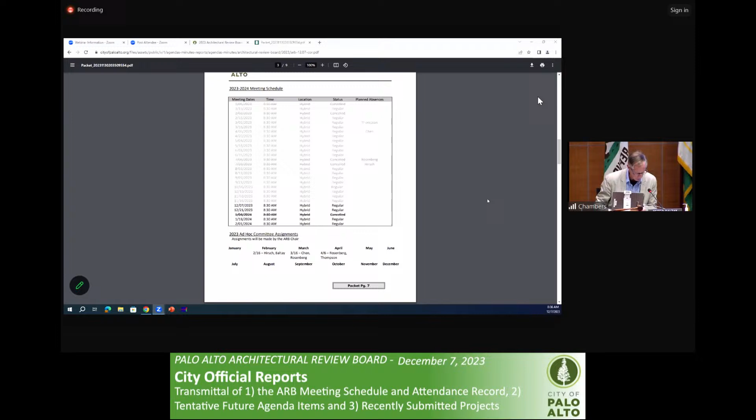So I understand we've shifted our retreat from early January to end of February. Is that right? Yes, my understanding is there was a movement afoot to put a retreat on the same day as the HRB meeting, which would exclude people like me because I am the HRB liaison. Not that that's why we changed it, but it's difficult to have two.

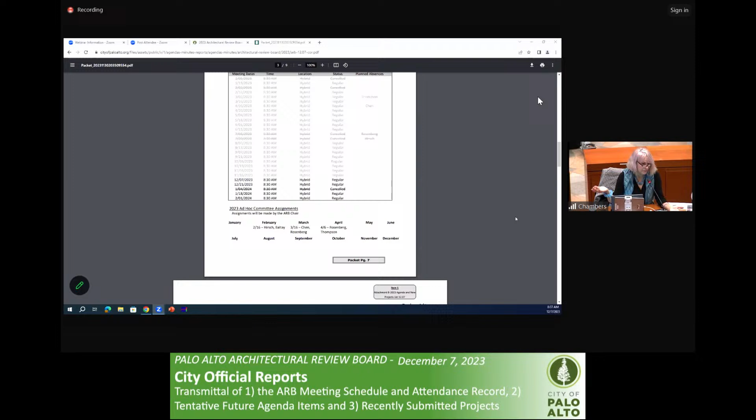I think we do need to have that on Zoom as well or recorded. I don't see it here, but I think the discussion was perhaps towards the end of February. I think it was February 29th, if I recall. Oh, leap year, that's right, it happens every 4 years. That was the discussion. So our retreat will be on February 29th, to my colleagues, so we know that.

In fact, that would be fun to put that in the bylaws: every 4 years, on leap year day. Just every 4 years, you need to have a retreat.

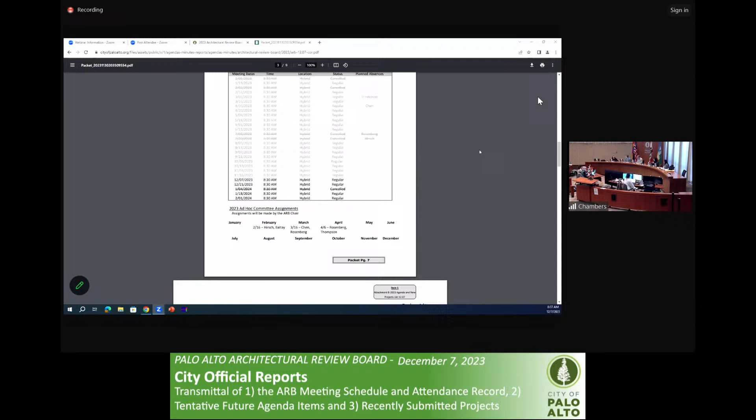Can I ask you, is it recorded? I don't think so, but... What, recorded that meeting as a meeting? Yes, a retreat is a formal ARB meeting that's recorded, and staff, am I right on that? The ARB retreat meeting is a formal public meeting. Generally we advertise in advance and put the potential topics to be covered.

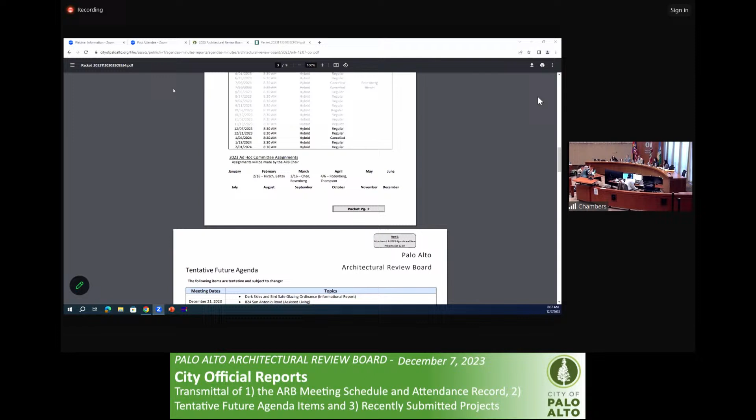We have to talk about which topics are on the list. You don't have to cover them all, but definitely think about them all in advance and plan for discussing certain topics. And then the public is invited to speak under oral communications or whatever we call it for this agenda, and then the ARB has a chance to retreat in a public kind of a way.

I'm just recalling the last meeting I remember is the one we had at the Art Center. We did one there, yeah, and I don't think it was recorded. Yeah, I don't know, I'd have to talk to staff about that. I believe the Art Center meeting held over the years was about the ARB Design Awards and selecting those. I don't know, I haven't been involved as the liaison for a while.

So my understanding is that we do record every ARB meeting. Well, thank you for bringing that to our attention, Board Member Hirsch. We'll make sure that in the future, all ARB meetings, including the retreat, are properly recorded.

That's fair enough. We do have our list of pending and coming in ARB projects, and we have a new one on the list I'd like to appoint an ad hoc subcommittee to. This is the fairly large project for 150 California Avenue that was recently in the news, and it's quite a big deal. I'd like to appoint a subcommittee for that. Does anybody want to be involved in that? It's at the very end, on packet page 13.

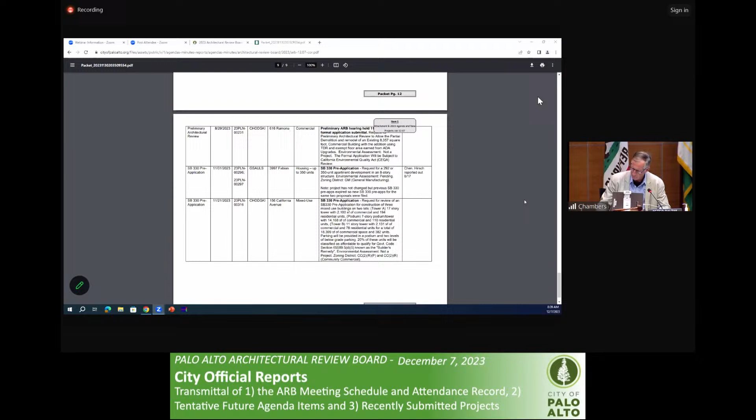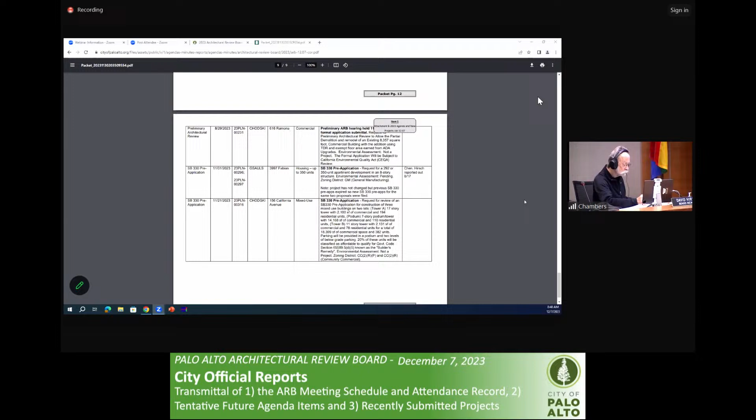Can I ask a question about this first? Has it been through council for preliminary approval? Staff, can you answer that? If you're talking about the 17-story project that has made the news, that came in without advance notice to staff. It has not been to city council. It has just been submitted and discussed in the media.

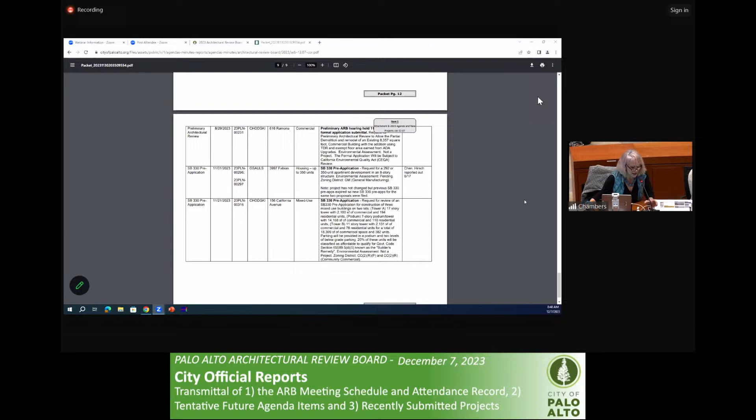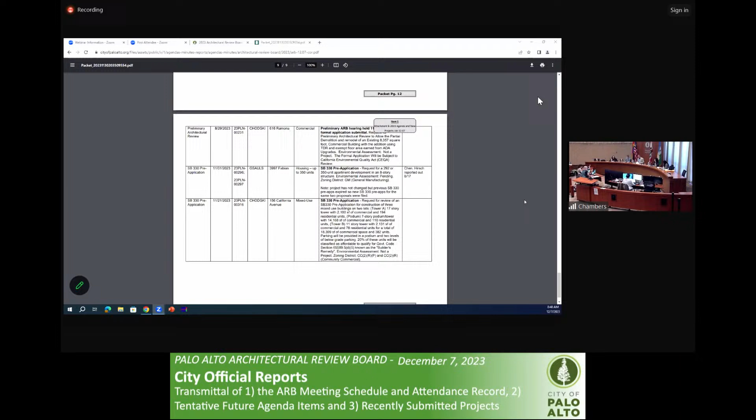Okay, next item is a study session. So we're going to move into 70 Encina Avenue. Request for preliminary architecture review of a proposed project consisting of 10 new condominium townhouse units and a new 3-story, 22,230 square foot building and site improvements to replace the existing surface parking area. The formal application will include a rezoning to planned home zoning.

So to my colleagues, this is a study session. There's no need for disclosures, but I'd offer anyone a chance who would like to make a disclosure. Board Member Adcock, do you have any disclosures you care to make? No? Board Member Chen? Yeah, I visited the site. Thank you. I disclosed that I visited the site as well. I visited the site as well. I visited the site.

Okay, so with that, can we have a staff report, please? Yes, I'll go ahead and share my screen and begin the presentation. My name is Emily Callis. I am the project planner for 70 Encina, and this is the preliminary review study session.

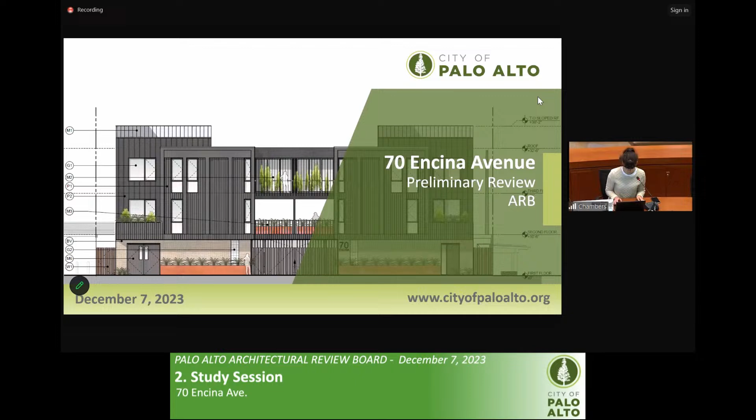This project, again, preliminary review for a proposal to rezone the two community commercial zoned properties to planned home zoning, PHZ, in order to allow for 10 residential condominium units in a 3-story structure on the currently vacant property. Per the planned home zone requirements, there would be a net increase in housing with no jobs generated and at least 20% BMR units provided, which in this case would be 2 units.

There was a council pre-screening in September of 2022. However, the project has been substantially redesigned since then.

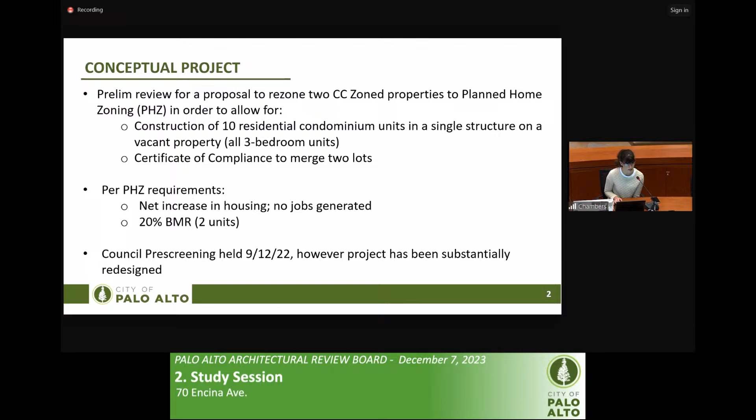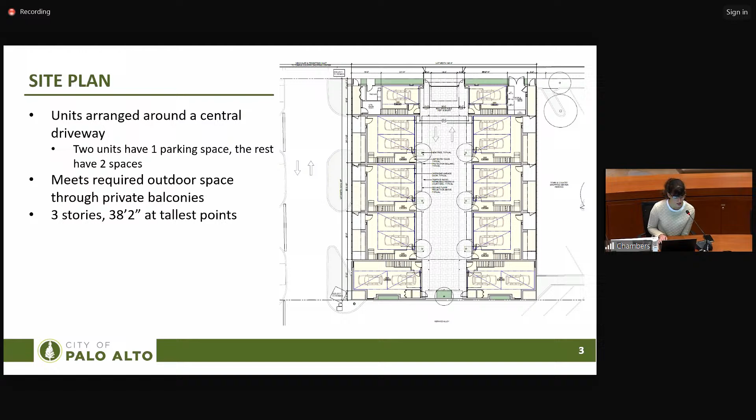The site plan includes the 10 units arranged around a central driveway courtyard. Most of the units have 2 parking spaces, though there are 2 units that have 1 parking space. There is outdoor space provided in 2nd-story balconies as well as in the side yard areas of the site. It's 3 stories tall and 38 feet 2 inches at the tallest points where 50 feet is allowed.

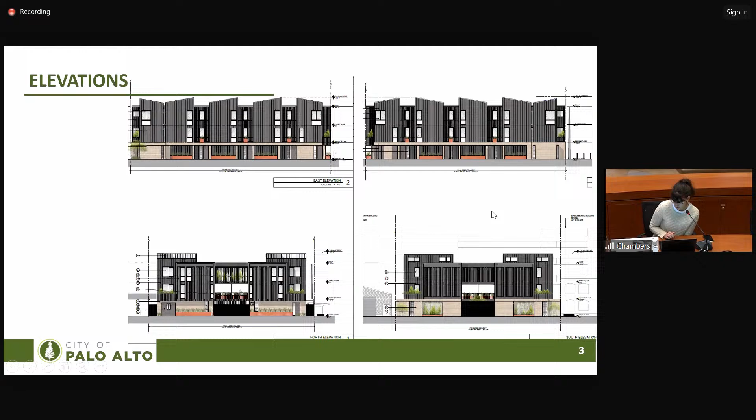In terms of the elevations, the bottom left is the front elevation, the 2 sides, and then the bottom right is the rear adjacent to Town and Country. The proposed materials include a brick veneer and glass block on the 1st floor with board and batten siding on the upper floors, as well as bronze and orange metal accents.

Considerations for this morning's discussion include the relationship between the proposed project and its setting in the Town and Country parking lot, the site circulation, the usability of ground level open space and overall site landscaping, the architectural design, cohesiveness and quality of materials, and consideration of the context-based criteria and objective design criteria.

Again, since this is a study session, there is no formal recommendation or motion. And I kept my presentation nice and brief this morning. Thank you. Thank you, Emily.

So to my colleagues, I'd like to structure this today by having a round of questions of staff. If there's anything, then we'll have the applicant who's here, I believe, make a presentation to us, and again questions, and then we'll provide feedback. Again, this is a study session, so we're not making a motion or taking action, but I think accurate feedback is really important here, and this is a tight project to fit in.

So any questions of staff on this? Well, I'd like to start. Could you explain, please, this is taking what seems to be a bite out of the parking lot that's well used by Town and Country. How are they able to do that?

So the property is independently owned by the current property owners, which is not Ellis Partners, who own and operate Town and Country. And so they are within their rights to propose a project on this parcel. And does that affect the Town and Country's parking compliance? It is my understanding that Town and Country has a TDM plan and it will not impact their parking.

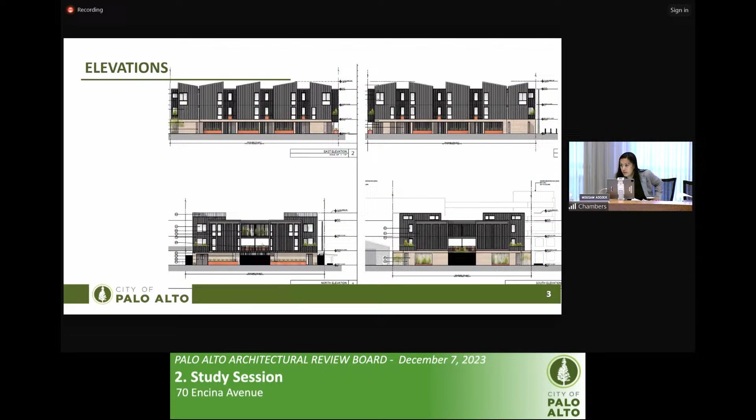So if I understand correctly, this parcel only has street frontage on Encina and no other drives, so fire access is only on Encina, with the townhouse proposed on the backside a couple hundred feet away from any public fire access. The access to the site is on Encina, and the site should be treated as an individual lot. As it continues through the formal review process, fire will be making sure there is adequate access within the site rather than accessing it from any of the parking lot sides.

Can I clarify that? I think it's an excellent question. The service alley that's there now, which appears to be a public alley, is in fact a privately owned alley owned by Town and Country, and so that cannot be considered as a fire emergency access for the site. Is that correct? Correct. Okay, thank you.

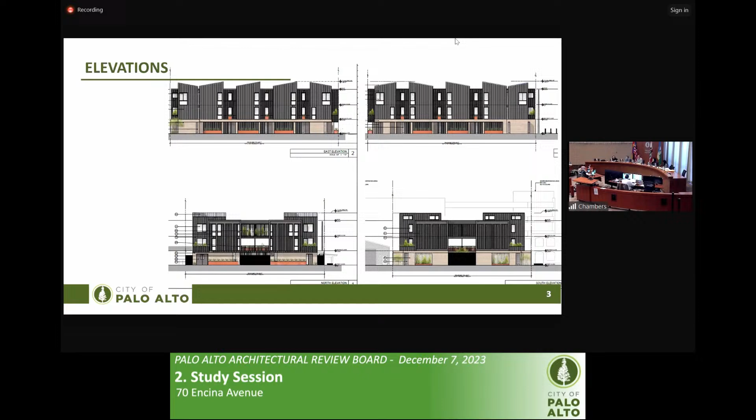Any other questions? Board Member Rosenberg: Good morning. I just want to back up here for a minute and start basic. What is the existing lot zoned as? Community commercial. Are they looking to rezone the property to be allowed to build the residences, or is that simply allowed under a CC zone? I believe mixed use is allowed, but I'll go ahead and double check that.

And while you're checking on that, I'll proceed forward. Did you have an answer yet?

Yes, it does not need to be rezoned to allow the residential use. It only needs to be rezoned to allow the floor area that is in excess of what would otherwise be allowed. Do you know if at this time the floor area they're requesting is meeting compliance for the CC zoning of a residential development? And does it need to be mixed use or can it be solely residential?

Attachment B of the staff report compares what is being proposed to the base zoning. Attachment B is the zoning comparison table, which compares what is being proposed to what is required under the CC Community Commercial Zoning District.

The places where it varies is the rear yard setback, which would typically be required to be 10 feet. The build-to lines, which would typically be 50% of the frontage built to the front setback. The site coverage, which is about 7% over what would otherwise be allowed. And the floor area ratio, typically 0.5 would be allowed and 1.84 is being proposed.

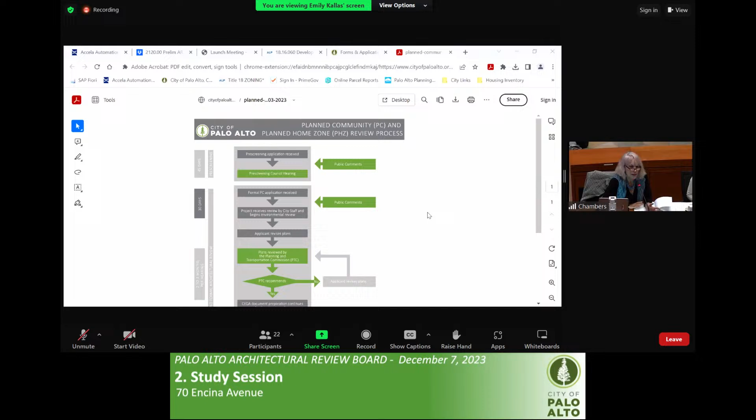It's basically planned community, in our zoning code. But they're not guaranteed, right? No, they're all part of the ask. Perfect, okay. Council, planning commission would weigh in on and council would act upon.

And is there any requirement for architectural deference to its surroundings, right? Neighborhood context, architectural context of its surroundings. It is notably next to Town and Country, which is low slung and very Mediterranean looking, and this is clearly not. So I'm wondering, is there anything in the requirements for development that asks for that sort of respect to its neighbors, architecturally speaking?

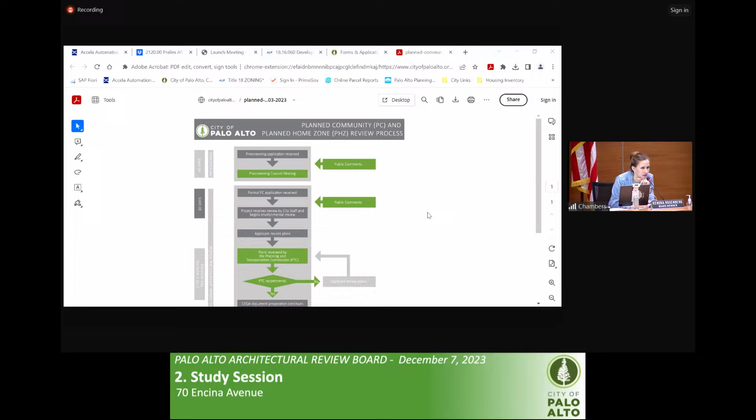Well, when staff is looking at projects, even for legislative projects like a PC, we do look at other codes such as objective standards, this kind of thing. We've gone through that with this board, and thanks for your help on that. So we can look at those guidelines and compare the project to those guidelines, for instance, or standards. But again, in the end, it's a council decision on the particular project on this particular site.

Understood. Okay, I believe that's all my questions for now. Thank you. Board Member Hirsch, any questions? I think everybody's been asking the appropriate questions regarding this particular project. Good. Well, let's keep moving along then.

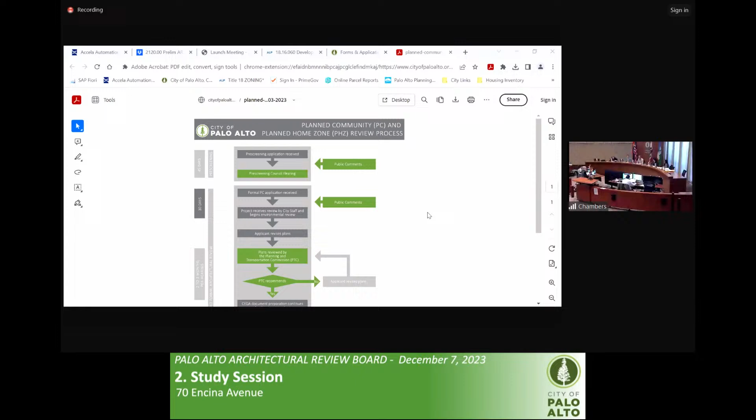We're going to next have the applicant give us a presentation, and after this we will take comments from the public. I understand Ellis Partners is here to speak as well. We very much want to hear what you have to say as well.

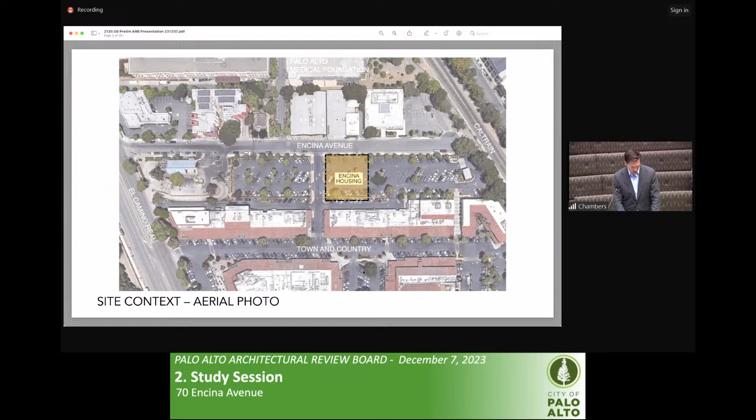We're excited to present this project to you in its newest form. The site has already been introduced. As you can see, it's two parcels immediately behind the Town and Country shopping center. We've already discussed the zoning of the parcel. It's surrounded by CC and CS commercial projects and properties. It's well outside the radius of any other residential project, so those impacts don't come into play here as they do on other sites.

Looking at the uses surrounding the parcel, basically all the properties on the north side of Encina are medical and professional office and support uses on that block, with a bit of change moving west. As noted in your questions, there's parking as well as a rear vehicular ingress and egress for Town and Country on both sides, and the southern edge is flanked by the service alley behind the shopping center.

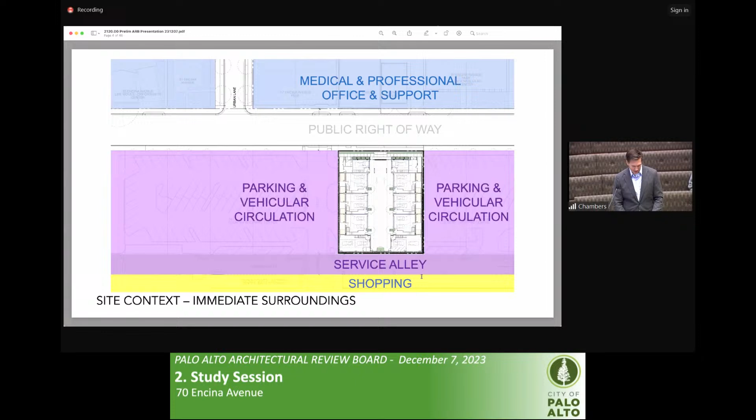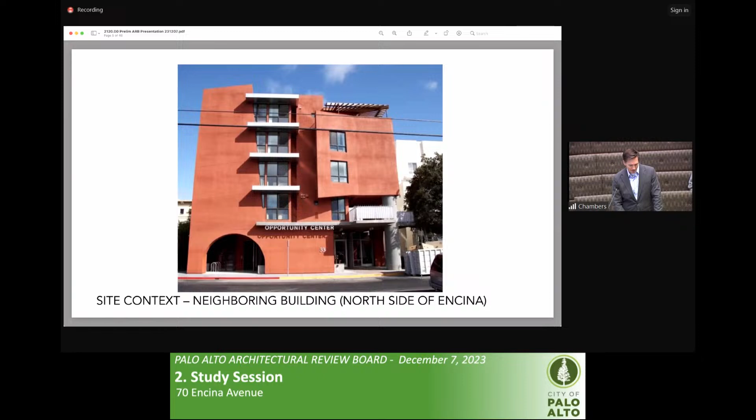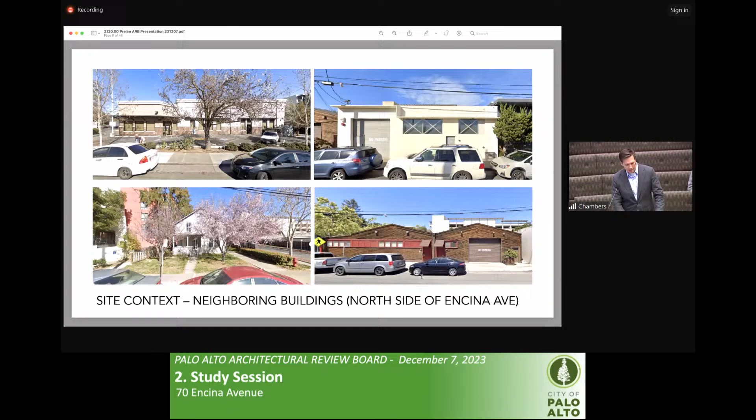In terms of architectural context, there's quite a mix of building styles. You've got the five-story Opportunity Center to the west, and most of the other projects immediately across the street are one and two stories - a very eclectic mix of material uses and building forms, with no real overarching style on the northern side of the street. Of course, Town and Country is a very large anchor to the south of the project, with a lot of consistency there - primarily single story with some two-story portions, predominantly dark painted materials with clay tile roofs, expansive coverings and overhangs in front of all the storefronts.

So we have these four very distinct edges: edge number one on the street, the typical facade; edge number two, a secondary facade you'll see a lot as you move down that vehicular ingress and egress; edge three, much more of a service side; and four, just basic parking.

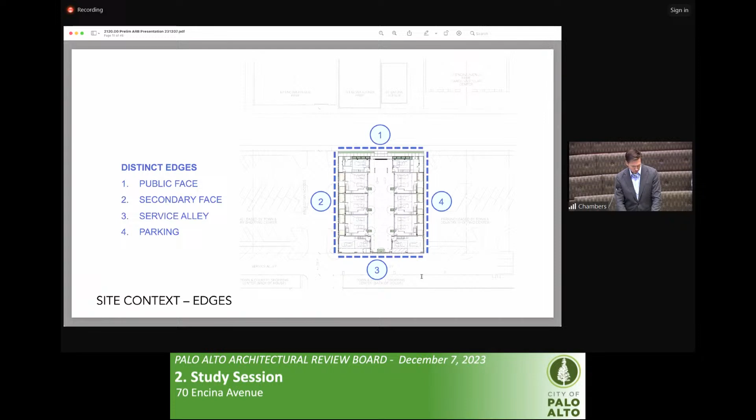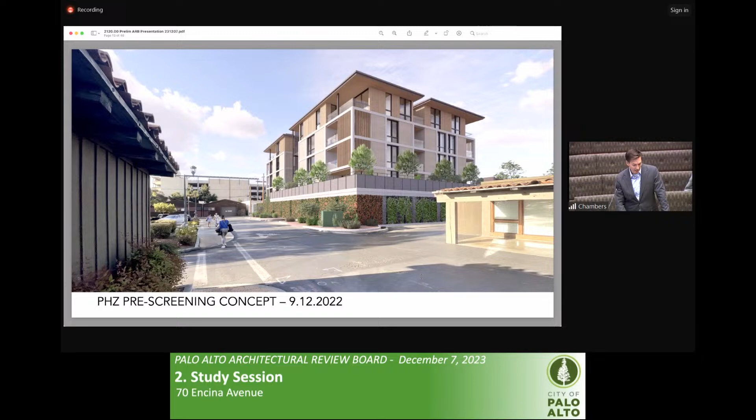A little over a year ago, we brought a pre-screening presentation to council. At that time it was a five-story project - four stories of units over a story of podium parking and utility uses, with 20 condo units. While it received a pretty warm reception, with a general feeling that housing was appropriate here for a lot of reasons, Town and Country took exceptions, primarily to the size and in some cases the use of materials. We left that meeting with an objective to work together with them and find compromises to pare the building down and make it work for both parties.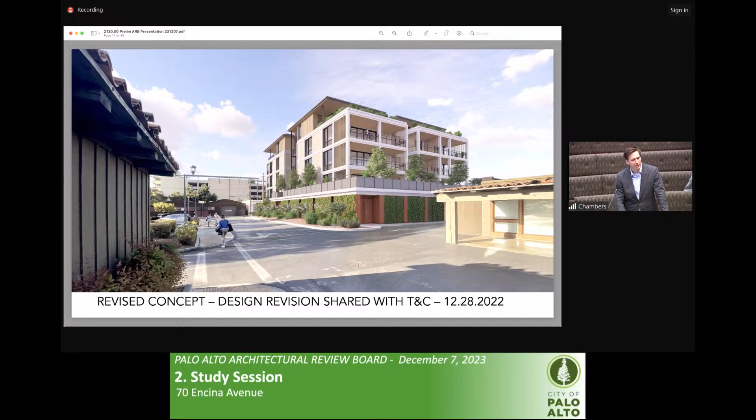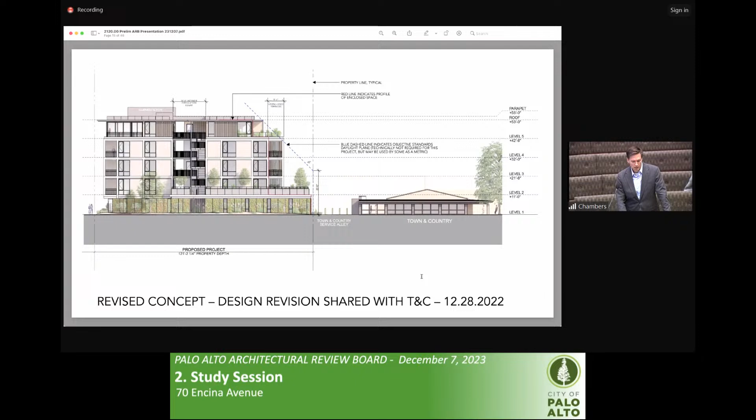Our first efforts looked at pushing the rear facade back a little and carving out a couple of units from the top story to bring the mass down and change the character of the back facade to be more open, with extensive coverings similar to Town and Country. That was not felt to be enough of a change to them, despite the fact that the massing changes put it within an envelope that would be more typical if there were a daylight plane required for the project.

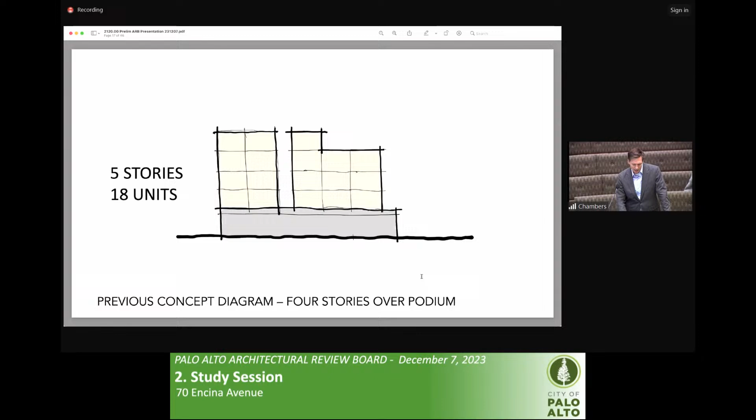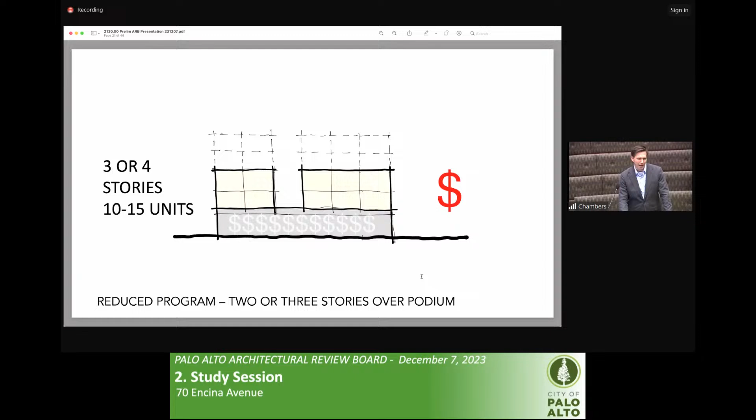So our initial concept of five stories and 18 units wasn't working, and paring it down a little wasn't working either. We had to look at how we could get to where they would like us to go - could we get to a three-story project? We studied a number of plans that still maintained a podium concept with units on top, getting to 15 units with a couple of different plan concepts shifting parts and pieces around. We worked with contractors to get pricing, but unfortunately no matter how we sliced those projects, the numbers didn't work - a lot of the cost in podium construction was too much for the project's finances to bear. So we had to step back and think about whether there was a three-story project that could work, and how to get construction costs down to a viable point.

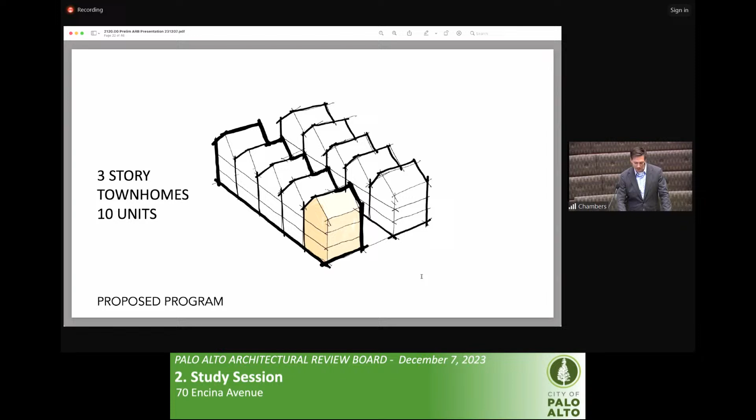The only concept we could find that would work is to change to a three-story townhome concept where we get rid of the concrete podium construction and go all wood construction. Each unit basically becomes a vertical stack where shear walls can be continuous to grade, so each unit now has its own internalized garage, more like a typical townhome project. When we overlay that concept on the site, it's 100 feet wide and 120 feet deep.

You start with a 30-foot wide access aisle down the middle, which has to be at least that big so two cars can pass each other, and so people have enough room to safely back out of their garages without encroaching into front door entry spaces. The central courtyard becomes not just the vehicular entry, but also the pedestrian entry.

Everyone's front doors are on this central courtyard space, so it becomes sort of a main street of the development itself. When you size the unit footprint to get a 2-car garage, you've got about 26'6" width, and you can fit about 6 of those within the site. You don't have quite enough room to do the same thing on the corner units.

We're able to get tandem parking to work in the rear too, but reduced down to a 1-car garage in the front. The gray areas in the corners are shared spaces like trash rooms, electrical utilities, and so forth. So we have 3 unit plans, basically A, B, and C.

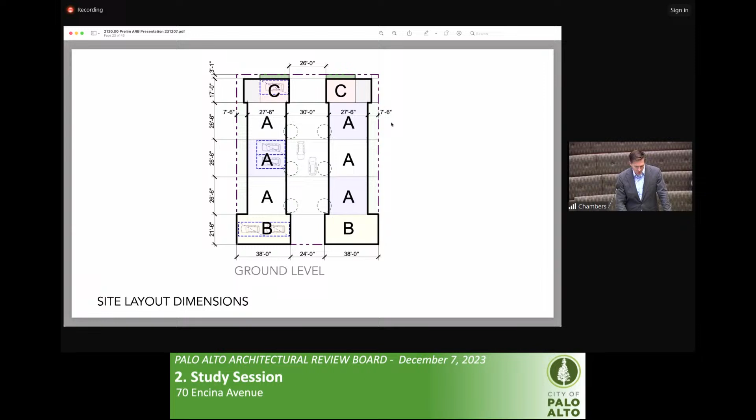Those essentially just extrude vertically with a little bit of adjustment in the exterior facade to capture a little more space over the drive aisle, making up for the smaller footprint of the corner units and allowing them to be 3 bedrooms as well.

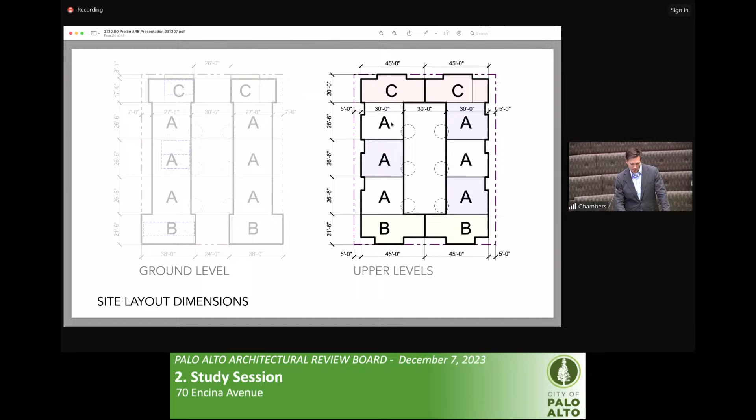So the yield of this new concept is half of the original: 10 condo units, mostly 3 bedrooms, and again 20% of them would be affordable.

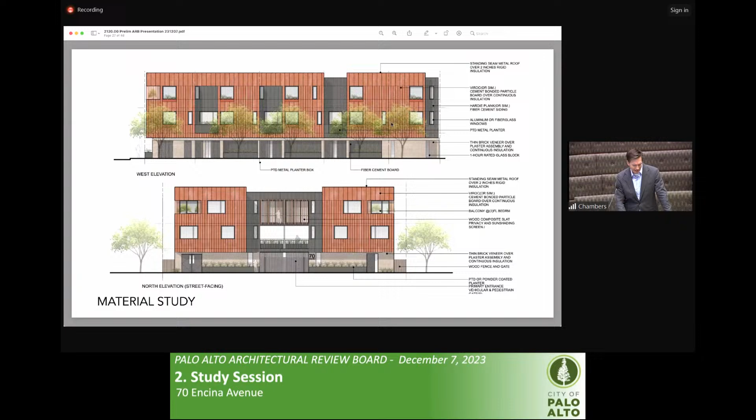We did a number of material studies, first looking at a similar palette to the previous proposal, sort of lighter toned woods, and introducing some board and batten siding, a material used at Town and Country. We also looked at another concept that wrapped the building in a more rectilinear unifying facade, but didn't feel it was as successful relating to the Town and Country vernacular.

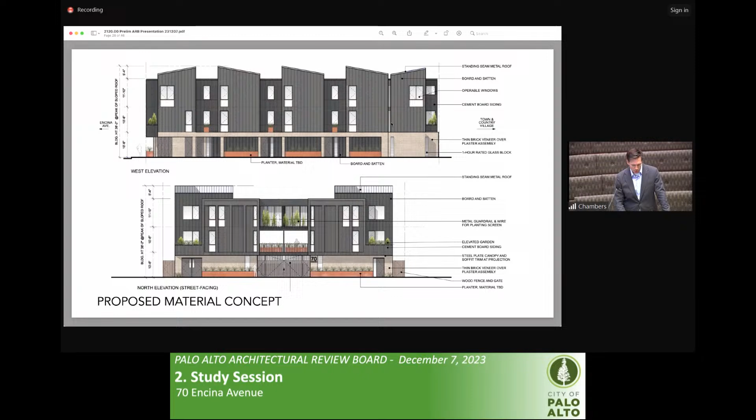So we shifted back to a modification of the original approach, where we opted for a darker palette much more in line with the Town and Country material palette. You see the board and batten siding there, the use of shed roofs, and the light buff brick base maintained at the ground floor.

I'll jump through the plans quickly—I think we've covered most of the high points there, but we can come back if need be. Again, 3 unit types, mostly 3 bedroom.

We'll wrap up by going through a few renderings—there are a few more here than in your packet. This is the front facade. Coming in a little closer, you can see the materials better here, the long Norman or Roman brick at the base.

The sidewalk in this area is only 6 feet wide, so we've taken the ground floor and shifted it back 3 feet to make room for planting along that edge and create a buffer space. The entry gate in the middle is as open as we can make it, for visual access into the central courtyard to be inviting.

You can see the terraces for those front two units up on the 2nd floor, which again help with the sense of openness of the facade, along with the mix of different fiber cement panel execution on the upper levels.

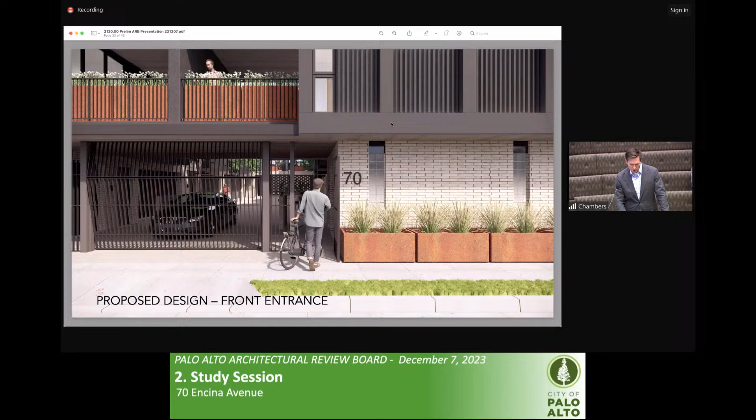This is a view from Encina, looking back at the corner of the building. Now coming around and looking at that facade, it's the secondary facade that flanks the entryway, the vehicular entry into the back of Town and Country.

What you notice here, which wasn't on the other elevations, is that as we developed the design, we added this trellis structure on both sides, as well as a rock wall fence, to help with the scale and make those spaces more usable and enjoyable, adding an element that speaks back to the language of Town and Country with the exposed beams and post structure.

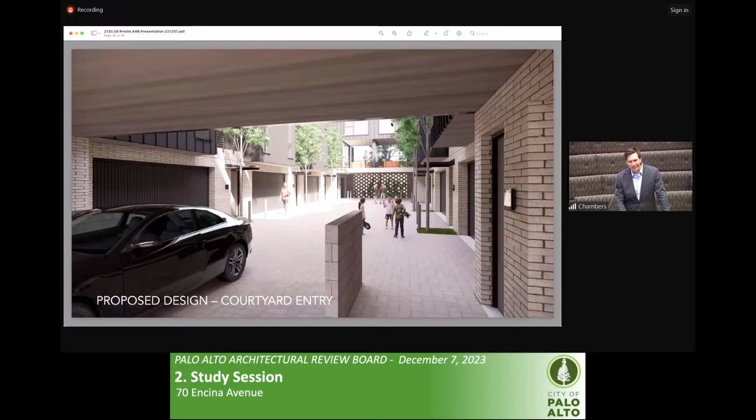Coming back around to the front and coming into the courtyard is really a key space to making this project work. It's a very unique context, and it really needs an internalized space to create this kind of Main Street feel. Everyone has a second story terrace that looks out over the space, and it allows the building mass to help shroud the occupants from the uses around it. We're very happy with the way it's turned out.

A huge precedent for us for this project was a project in San Francisco by Dan Solomon, probably 20 to 30 years ago, called Fulton Grove. And it's really a successful space to this day.

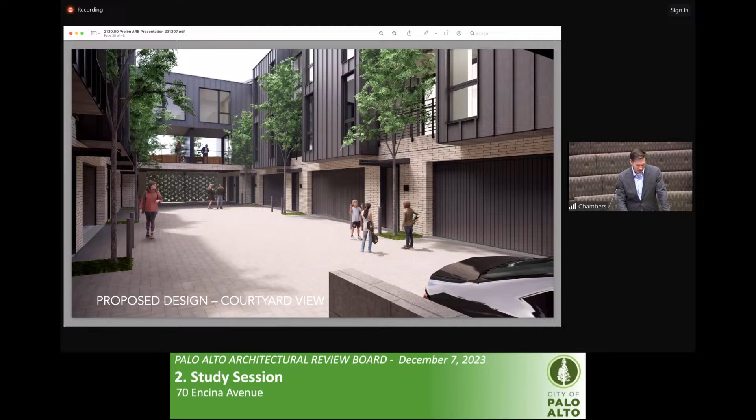I see that I'm out of time, so I'll just run quickly through these images. You can see here the trellises around the side yard spaces, and lastly, an image looking back from the northeast. We'll look forward to hearing your feedback.

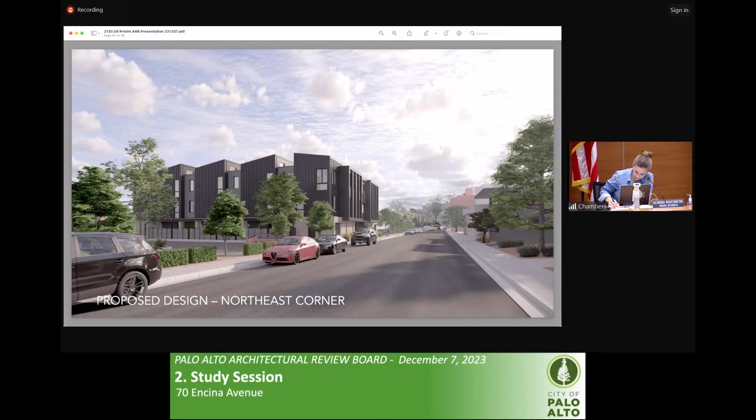And just for clarification, your 20% for the below market rate, the BMR units—that's going to equal two? Correct. That's all I had for right now. Thanks very much.

Board Member Adcock, do you have a few questions? Thank you for your presentation. Based on what you shared, the additional renderings versus the plans on our set—the plans are pretty much the same, is that correct? Correct.

So my first question is about your first vehicular entry from Encina, which is shown as a 14-foot wide gate with pedestrian door gates on either side. 14 feet seems a little narrow for two-way traffic for cars.

Additionally, based on my previous question about fire access, is it expected that emergency vehicles would come into the courtyard from the back, in which case, based on the height of your buildings, I think you need the 26-foot width with the 13.6 aerial access clearance. Is that not the case?

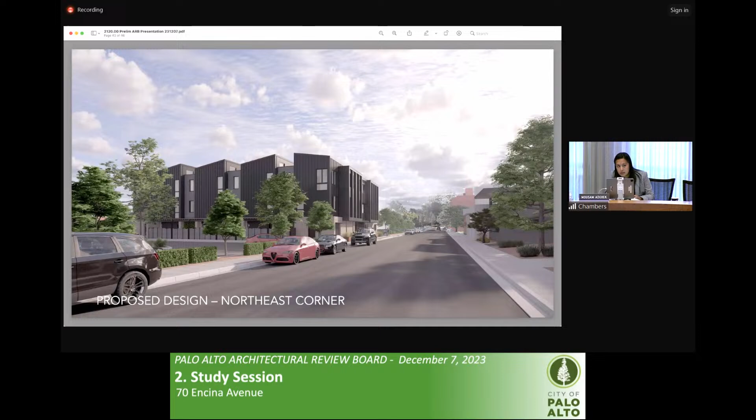Yeah, the project is small enough that it isn't. The fire department would not be expected to bring their engines inside—that would need a much higher entry portal for that. Isn't that three story and 30-foot eave height that pushes you to the aerial access requirement? Which you are already taller than.

So we have had meetings with the fire department on previous iterations. There will be more discussion that has to happen with that. The way the plan is configured, the majority of the bedrooms are all located on the courtyard side. So for fire access, if I jump up to the second floor, you can see that in the core units the master suite and bedroom are both on the courtyard side, and the front units all face Encina. They can get ladder access up to the third floor just from the ground and don't need a hook and ladder truck to get up to the third floor.

So they would be actually coming in and doing rescue from bedrooms through the courtyard, without the need to bring their vehicles in. Of course, there's a long ways to go with working out all the logistics, but that's the concept.

And to your earlier question about the width of the ingress—once you're inside the courtyard, it's 30 feet wide wall to wall, so there's enough room for two cars to pass each other with some buffer on the side. The city has a published document that lists the required width of ingress ways based on the number of units, and 14 feet is allowable for up to 10 units. Okay, thank you.

Another small question: looks like instead of the fence that was indicated in the drawings, that's the rock wall you're proposing, correct? Correct. So behind that, you have the small patio area for each unit.

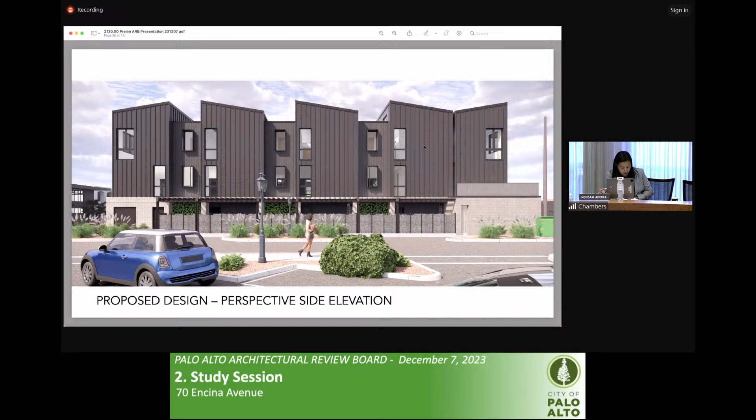And one last question is the planting areas that you're showing. First, on the very first floor at the notches, if you go to your floor plan, A2.01. Actually, no, this sheet is fine. On both the bottom right and bottom left, kind of right behind your rock wall, there's a little green patch. Is that being planted? How is that being maintained, especially knowing that it's landlocked by other people's property? At this point, as an early preliminary ARB, I'm not going to tell you we've got everything totally worked out yet. We're looking for your feedback on what we have to share today, and we've got a little ways to go.

Okay, and same thing on the upper floor too. You have planting areas outside kitchen windows that are beyond accessible. Right. That's all my questions. Thank you, Board Member Adcock.

I'd like to look a little bit deeper with you, if I could. Why did you not choose to put underground parking instead of keeping at-grade parking? All your proposals throughout this project have always maintained at-grade parking. It's all about cost. As soon as you put underground parking, you've got to get down there, so you lose a huge chunk of the site just in ramping down, and you've got the costs of the basement parking itself. It kills the project right from the outset. Did you actually study that as an option at some point? We did.

Could you clarify again your decision to go from, originally your proposal was 5 stories, 20 condo units, more as an apartment building, and you even tried paring that back some, stepping it. And now you're at 3 stories in townhouses. What was the rationale for going between those two designs? This is radically different. Completely cost driven. You take enough out of the previous concept and the numbers don't work anymore. You've got to find a way to get the construction costs to come down enough to make the project feasible. The land costs don't change, soft costs and a lot of other costs don't change. There's still massive costs for utilities and infrastructure and city fees. It's a tough equation to make work. You've seen a lot of projects presented in this town in the last few years, and many of them didn't advance past the initial stages. It's a tough nut to crack.

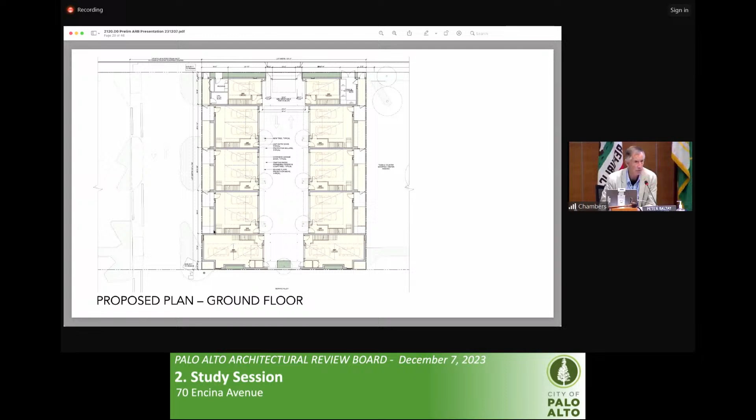So this is hypothetical, but if you had a 4-story condo type building, maybe 15 units, do you think that would pencil out? The problem with getting to 4-story condos of this style is there's a limit to how many stairs people want to go up and down within the unit. Well, I'm saying go back toward your original design podium ideas with 4 stories. I don't know, my gut feeling is no, just based on the numbers we've studied so far. Okay, thank you for your honest answer on that.

Any other questions? Yeah, I do have a couple of minor questions. One question on the functional side: for the package delivery room and the trash room, what's the sort of, how will the tenant use that?

Will they come from the front door and go through the gate and then go to both of the rooms? I think that would probably be the typical strategy, people would come out their front doors through the central courtyard and around to the trash room. Hypothetically, you could use your rear yard, but then you'd be crossing through your neighbor's yard to get there. And there needs to be some thought about how that works into the bylaws of the development, right?

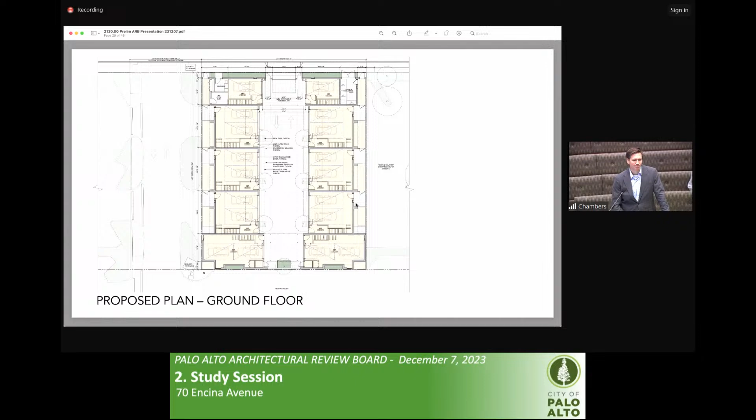Another question about the upper floor windows, the bedroom and living room windows that currently are facing each other directly. Have you thought about offsetting all those windows?

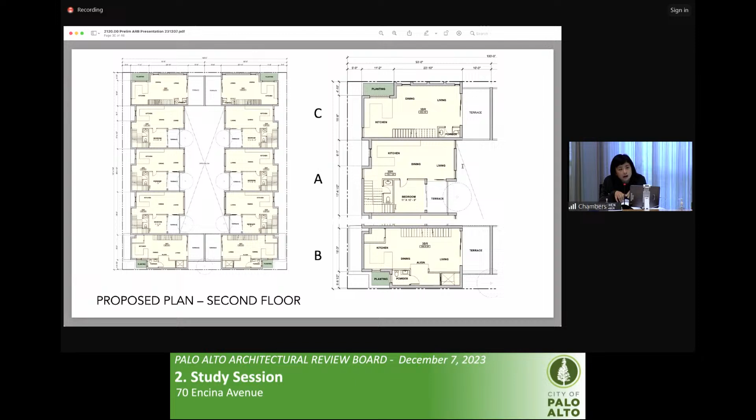Yeah, it was a key concern. What we determined was that at the living room level, we've moved the windows off to the corners. You typically don't occupy the corner yourself, you're more in the center of the room, so you wouldn't have a direct view right into someone else's living room. Similar logic on the upper master suite, pushing the windows to the corners. For the bedrooms, we could certainly flip which side the glass goes on if we felt there was a benefit there. That's a good comment.

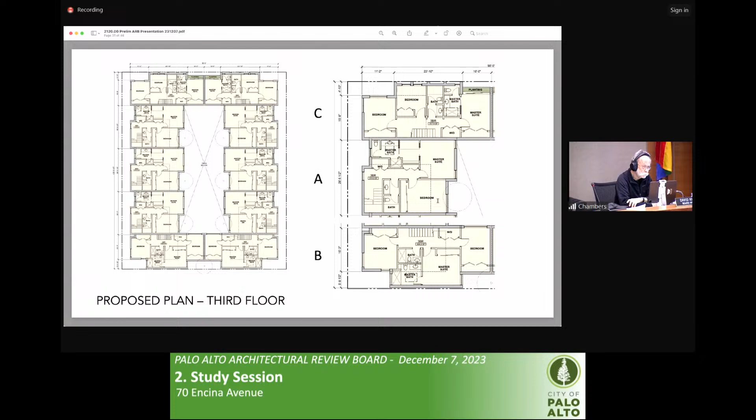Typically we are not allowed to have more than one curb cut into a project. Once you take that curb cut up with the central drive aisle, we'd basically be asking for the whole street frontage to be curb cuts, to get the central drive aisle and additional ones for those two units. I saw that as a non-starter, but if the city's open to it, we're open to looking at it.

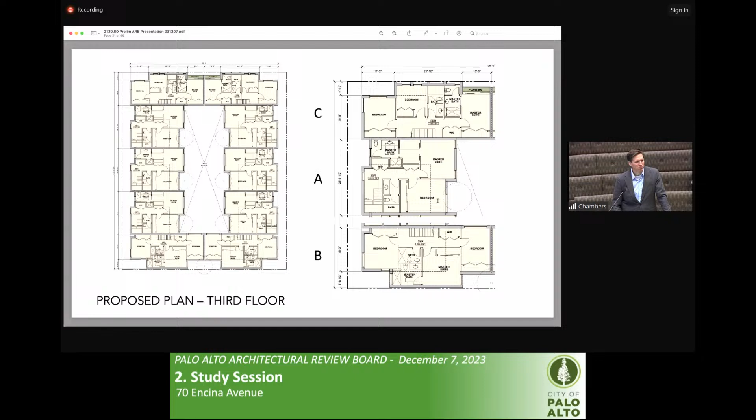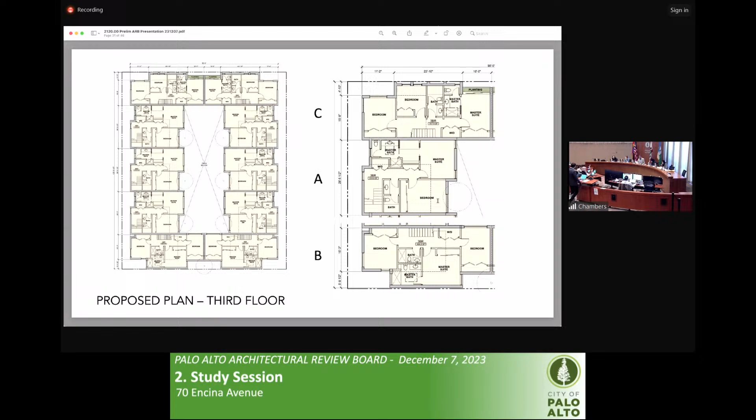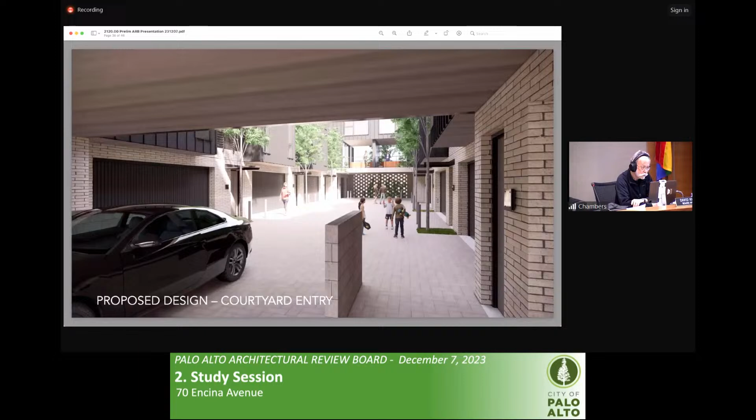You're showing changes here to the areas that are the outside use space on the ground, where you're coming through a garage to use a space outside of the garage, and you indicate there'd be some table or use of the space. How do you relate that to the program, which is really basically upstairs?

Yeah, how people will use those spaces, I'm sure everybody's going to have their own idea. One person might put their trash bins back there, one person might put a little play yard for their kids. I think it's up to each occupant how they value that space. But they have it, right?

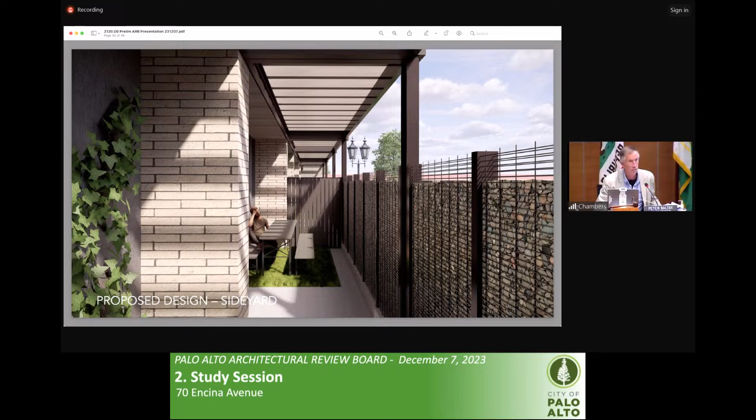Well, the compatibility comes in the use of materials and the vernacular. You can imagine all kinds of different projects that you would look at and say they're absolutely not compatible. A large glass-sided office building is going to look way out of place. A really Spanish colonial style project is not going to look right next to it.

Town and Country has a unique style of its own. I think if anybody takes the position that you have to be one story in order to work with it, then I disagree, and I think that leads to no project. I think the use of materials, the use of simple building forms, the shed roofs, and the trellises we've added along the edges—I think it's very compatible.

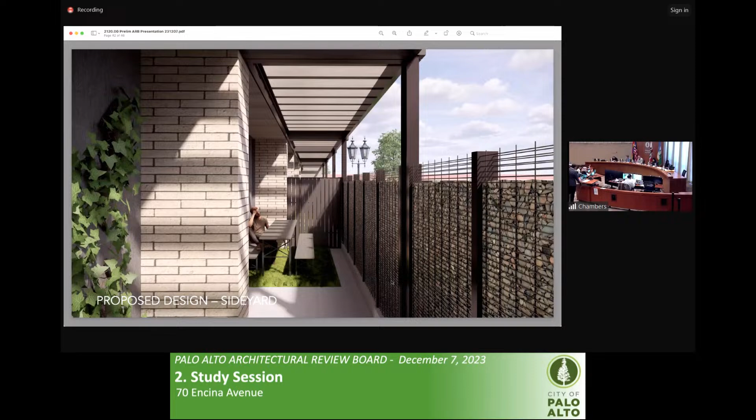Okay, thanks, no further questions. And we're going to open the meeting to public comment. Do we have any members of the public who wish to address us? Yes, one from Dean Rubinson.

Good morning, and thank you for making the time to come speak with us. You will have 3 minutes. If you could please state and spell your name for the record. Thank you very much, I will do my best to keep it to 3 minutes. My name is Dean Rubinson, D-E-A-N R-U-B-I-N-S-O-N.

Thank you. I've been the Director of Development for Ellis Partners in Town and Country Village since 2005. I've been managing the renovations and tenant improvements at the property for the last 18 years, and I'm happy to have seen this property evolve into the treasured community gathering place that it is today.

I first want to clarify that Ellis Partners is very supportive of new housing in Palo Alto and the Bay Area. With that said, we strongly believe that the proposed project as currently designed threatens to permanently degrade Town and Country Village due to its disregard for the contextual urban planning and lack of consideration to the impacts on vehicles, pedestrians, parking, and other operational elements.

This developer is asking you to change long-established zoning and density rules for them. They have acquired an isolated quarter acre in the middle of a parking lot that has served our center for 70 years and is looking to maximize their profits by cramming 10 3-bedroom luxury townhomes onto it, regardless of the short and long-term impacts that it creates on this unique and historic community gathering place.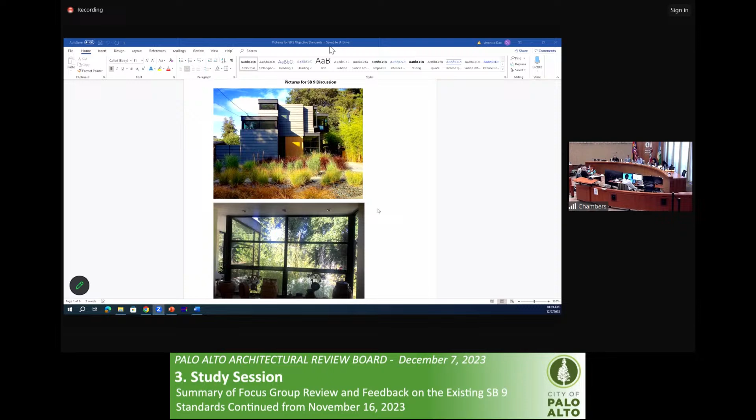Okay, I mean, I could also describe it. I just think simply, we're all pretty well versed. You want to see this stuff? That's fine, so let's limit it to maybe 3 minutes though. Is that okay, David? Just put a time on this. So why don't you discuss to us your opinions about landscape screening? All right, in some here we go. There's more.

Well, yeah, keep going. Maybe it's on here. I'm not sure if it's part of this one. Just stop there for a moment.

To the left-hand side, I can almost point it out to you. There's a 6-foot space, that's a lower metal gate that gets you to a side yard. The side yard is 6 feet wide. I actually have light wells within the side yard taking up 3 feet of the 6 feet that extend down to a basement. It's not possible to put trees in the area of the house itself. What do you do in a situation like that?

So the screening landscaping requirement is to have at least 1 tree per 25 feet of property length. These do not need to be evenly spaced, so it would be possible to stagger it in places where there's light wells or something like that.

Additionally, in cases where there is a 6-foot setback, again, this is typically something that we require on individual review projects. But some SB 9 projects may potentially have as little as a 4-foot setback. So that can be studied more, but typically we haven't had any comments from building or fire that it's been an issue to have landscaping in the side yard setbacks.

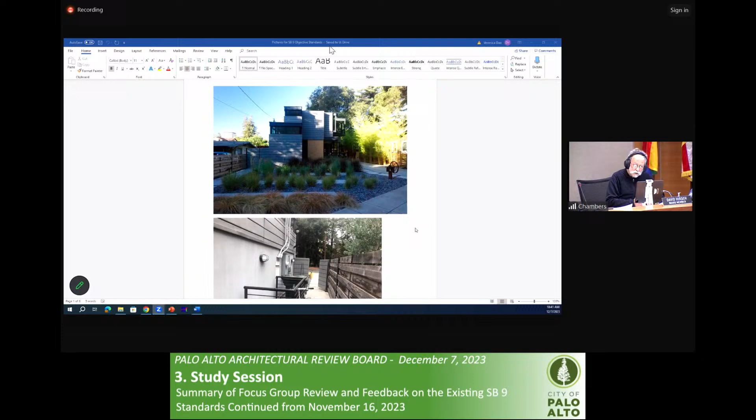To add to it, the other slide that I have, maybe I could find it, but I don't really want to waste that much time on one item here. So in the 6-foot, I have my garbage cans, I have the gas meters, the water meters, et cetera. All of these things take up space. And there are some trees that you could put in that are very shallow at the base, like, I forgot the name of them, but in any case, anybody knows they can add it in.

Within 2 feet, but it would eliminate the possibility of the light wells for sure. There wouldn't be passage through that side of the house. The garbage cans wouldn't be able to get in and out. Maybe the point is that it would be an IR, right? And any project like that.

But what if actually when we're trying to get tighter buildings onto these sites, and it is allowed that you have a 6-foot setback based on the daylight plane, et cetera, you may not be able to get planting at all in that area. So I don't think it's reasonable to suggest that you can have a continuous line of trees spaced 25 feet apart. I think it needs more study.

Okay, so David, I'm hearing you say that you think requiring landscaping of almost any kind on a 6-foot setback doesn't work. Yeah, might not work. And in this section B7, it does offer the option to have 3 closely spaced screening shrubs instead of trees. Do you think that would work?

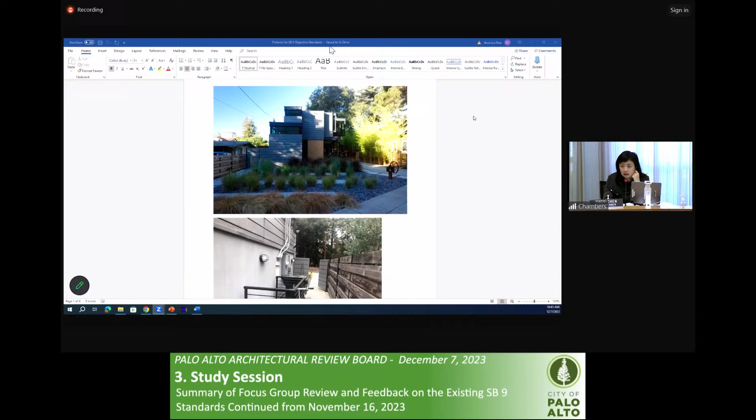So in that case, is there a way to make an exception to not planting anything? Staff, what's the situation when neither property owner wants the landscape screening? Through the IR process, because it is discretionary, there can be some option to consider alternatives, but overall we usually do strongly encourage or require the privacy landscaping.

Though there have been instances where neighbors have been against it. And of course, one of the considerations for SB9 projects is that neighbors will not have the opportunity to comment because they are ministerial projects.

Would it be possible to add in ministerially, if the adjacent property owner waives in writing that requirement, it can be waived? Is that getting too complicated? We don't have a mechanism for ministerial projects because these are not handled by a planner that is focused on design review. This is just going through. So I don't think that's something we would do, once it's an exception, it goes through the IR process.

That's how it goes. I'm not talking about an exception. I'm just saying you can either provide these landscape screens or provide written notification that the adjacent owner doesn't want them. There's no notification requirement for the IR.

SB9 projects, because they are building permit projects rather than planning entitlement projects. The rationale behind there not being a noticing requirement is that the neighbors do not have an opportunity to appeal the project. So it would be difficult to give neighbors that type of opportunity without creating issues.

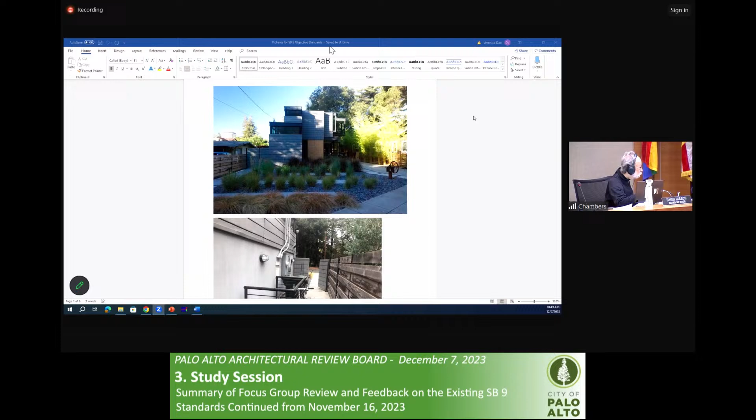I just like to say podocarpus, that's the name I'm trying to think of here, right? Podocarpus will grow, it'll grow up to a minimal tree, but it'll be 8 or 10 feet tall for sure, or it can grow to be huge. Could be higher. So I was just asking within 2 feet of space.

So how would you enforce this, Emily? Podocarpus is certainly a common screening tree in the individual review projects. We have a list of a couple others that are commonly used. But in terms of looking up what the mature heights of trees are, there's a couple of websites. You noted the Sunset guidelines. There's also a website, I believe it's called Select a Tree, that also has that information.

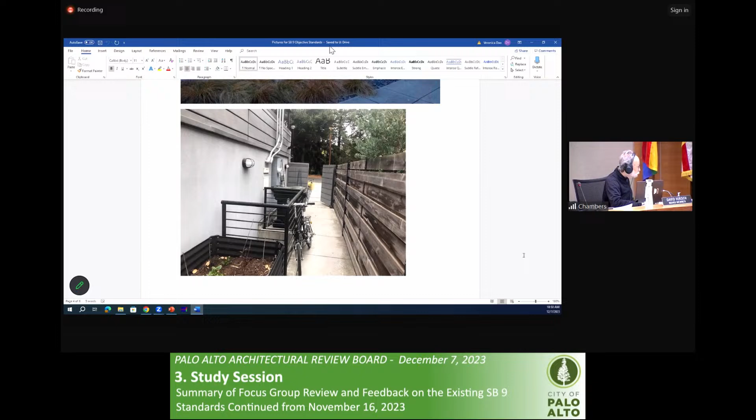I'm of the opinion that we should reduce the mature shrubs from 20 feet to, say, 13 feet, and the width to 3 feet. It's all arbitrary, but just trying to make it a little bit easier to fit something in there.

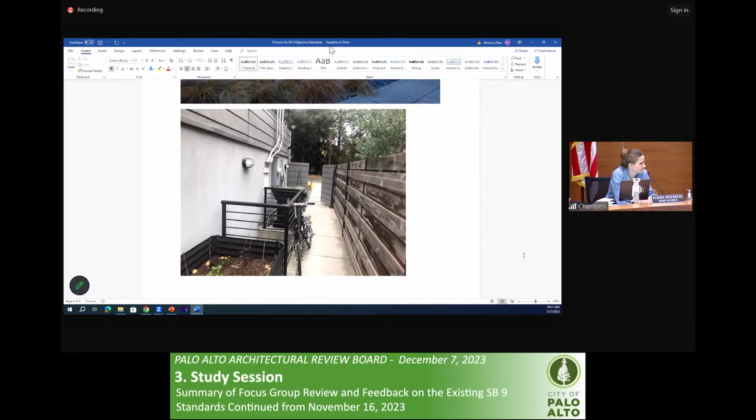Any other thoughts? I would agree with that, but I might knock it to 10 feet even, because you really just need a little bit of screening. Fences go to, what, 6, 7 feet if you're lucky. So just a few feet above that, I would try and make that screening a bit more modest. I know we're talking just a few numbers here and there, and it is pretty arbitrary. This is intended to apply to 2-story homes, so you're supposed to be screening the 2nd-story bulk.

So what's an appropriate height for that? From my working with landscape architects and our planting choices, shrubs will say this will grow 12 to 15 feet, and the next one will say 16 to 20, like plants and trees. I think if we use those kind of numbers, because there'll be shorter ones that say mature height 8 to 10 feet, right? So I think if we say 12 feet, we're probably talking in the 12 to 15 range type plants. Okay, so that would be fine.

So 12-foot height, good with that. Your wheels are spinning, what are you thinking?

No, you just mentioned we are talking about a 2-story house, right? So the intent is to protect the privacy. So for 12 feet, I was thinking, okay, even when they do a 9-foot ceiling plus the thickness of the floor, and then for the 2nd floor facing the side yard, we require most of them to be above - the window sill would be 5 feet from finished floor. So that already adds up to 14 feet, 15 feet if including the floor thickness. So should we say 15 feet then?

Well, the side yard window sill height you mentioned already makes it so you're not looking out that window into the other neighbor's house, right? So I think the screening of up to 12 feet is mainly screening from the 1st floor out, and having some landscaping when you're looking out from anywhere else. Because when we say shrubs at 15 feet, it's a whole other category of shrubs, so that's what I don't want to push it to. You can only have those tall columnar trees, really the only way to get there. It seems a little too restrictive if we're talking about shrubs - if we're talking about trees, that's a different set of categories.

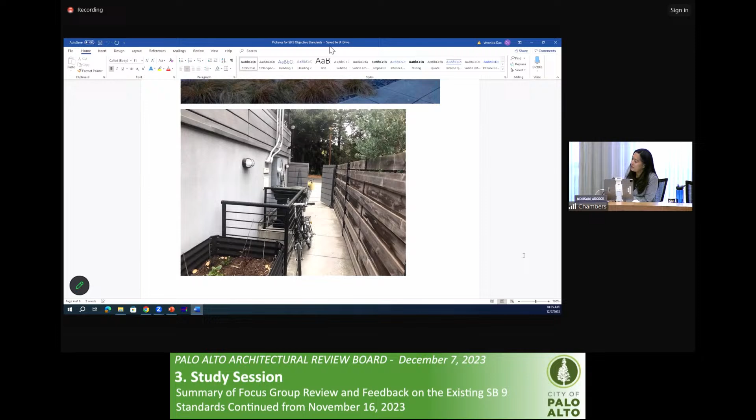Well, we're trying to give them options. So these are minimums. We said 3 feet wide, I think you had suggested. It sounds like we're coming to 15-foot height, 3-foot width as a minimum. Do we have consensus on that?

Good with that. Sounds good. I've got oleander growing in 8 inches of dirt between my fence line and my neighbor's, and it's 15, 16 feet tall. So I'm hearing a suggestion of shrub height minimum of 15 feet and 3-foot width.

Let's do a straw poll on that. Are we all in agreement? David, yes. Kendra, yes. I agree, yes. Okay, I'd like to try once more and ask Arnold to give his comment on this.

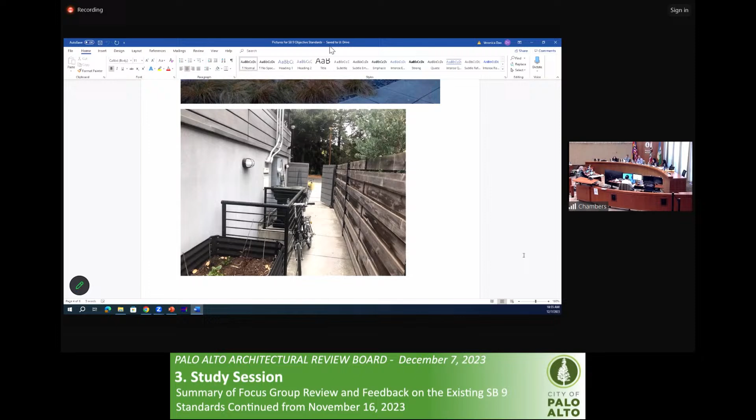If an adjacent property owner submits in writing a statement that they agree to not have privacy screening, can that be used instead of meeting this requirement?

Generally, when we have that come up in the individual review context, we require some landscape along the side yards, but it's usually a height issue, and we allow them to select items of more limited height. They want no landscape along that lot line at all. I think usually we try to find a compromise that works well with the neighbor, but isn't just completely avoiding the issue.

I guess I'm more sympathetic to what Board Member Chen was talking about. This is sort of an agreement between consenting adults. And if they don't want landscaping on their property line, who's the city to tell them they have to have it? I don't see it forming neighborhood character. And if it's something that can be done as a simple mechanism, just a letter from one property owner to the other, why would that not be adequate?

So I don't know if it's something that's been done before. Typically, the rules try to go beyond any one property owner. The fear is if the next owner doesn't like it, then you have a problem.

But I'm sensitive to the situation Board Member Chen was just discussing. Is that something the city doesn't have a way of regulating? If it was a letter from one property owner to the other that the city gets a record of, maybe it's a recorded letter even, who cares?

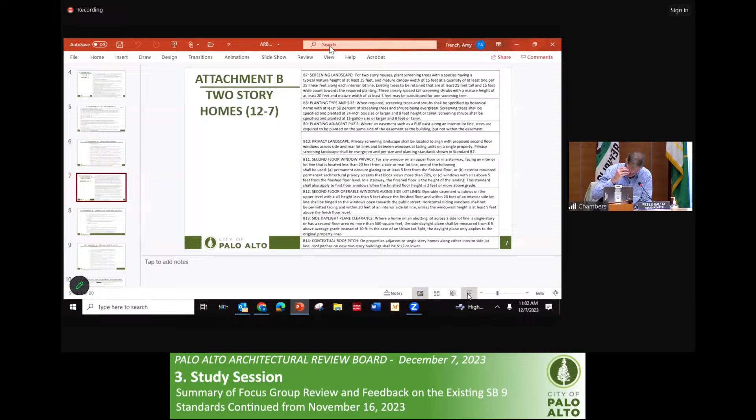So let's go on to the next item then, the planting. What number? What are we on? B8 is requiring - it's on the screen now, B8 - 50% evergreen screening. Trees are 24-inch box or 15-gallon shrubs. What is this? Oh, 8 feet when they're planted. And I had questioned whether native species should go in. Is 8 feet when planted a realistic requirement for a shrub?

This is a standard condition of approval for individual review projects. It's something that we have been going out and doing as a part of our final inspections for the last several years, and it is something that most applicants have been able to meet.

Okay, what's an evergreen? Is bamboo an evergreen? Sure, it is. Okay, yeah, are you sure? I would default to urban forestry for that type of question. Yeah, there's widely accepted standards for that. See, I have bamboo on my property line on one side only, and it is about 14 feet tall and is doing a pretty good job of shading. Is there any appetite to question the species that's being selected?

I guess not, okay, let's go on. Actually, but per your comment about native plants, I think that is a good idea. As in this, when it says 50% screening shall be evergreen, we should also, if we're going to ask for some amount of native, put a percentage to that - say 25% of the planting - so that half of evergreens and half of non-evergreens could be required.

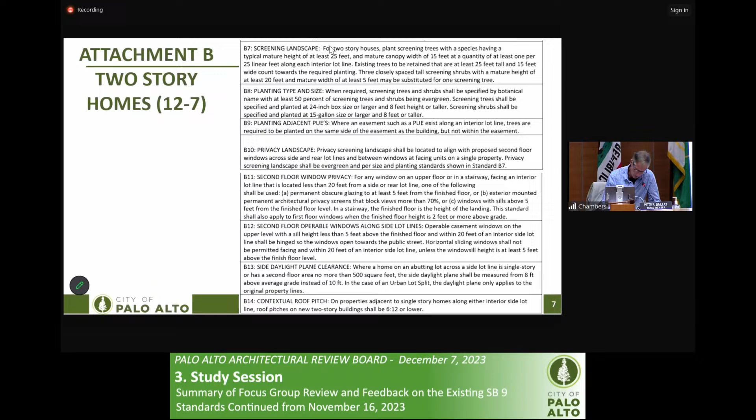B12 is operable windows along the side line. And my comment here was, what if I have a double hung window? There's more than just sliding windows and casement windows.

Arnold, would you like to speak to this? I mean, it is something that we have typically been requiring on individual review projects. Yes, this would allow double hung, vertically sliding windows. This just restricts horizontally sliding windows.

And why is there any difference as far as privacy goes? I think horizontally sliding windows, when you're using obscure glazing, when the window's in the open position, allow more view out than a vertically sliding window does.

So we tended to look at casement windows - if you hinge it on the side facing the street, it's more likely to still obscure the view into, say, the neighbor's windows or rear yard. With horizontally sliding windows, you don't have the advantage of the hinge window still having some functionality when it's in the open position.

The vertically sliding windows do provide some constraint. You still get some view when the window's open, but usually the lower half of the window being open has less impact than the whole window would with a horizontally sliding window. We've had this come up in back and forth discussions with neighbors in specific situations, which is informing this language.

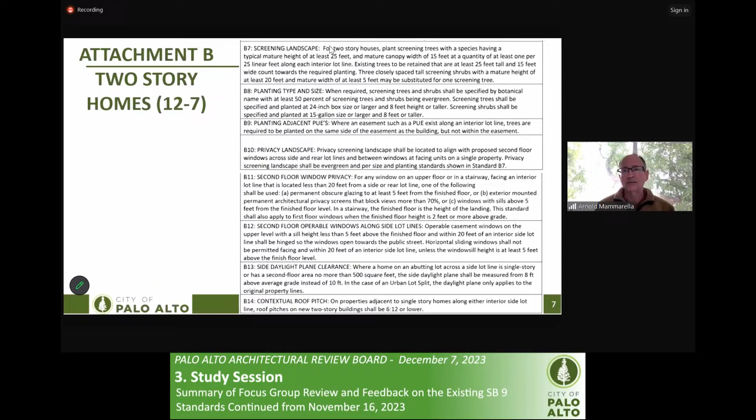Well, it comes up enough. I mean, it doesn't come up on every situation, but it's come up on many situations. That's why it's here. Yeah, I just can't think of another way to do it. That's subjective, objective. Let's move on.

Side daylight plane clearance, any questions? You're lowering the daylight plane measurement to 8 feet from 10 for side yards. I'll just note that this kind of has been dealt with in previous discussion with the ARB about daylight planes. So we can just forward those notes from the last time so that I'm hoping we can finish the B section and then maybe continue the Eichler till the meeting of December 21st, being that we have 2 ad hoc items, and I have an EOC drill at noon I'm supposed to be at.

I'm going to speak to this last one because it would severely impact my house, and I imagine it would severely impact a lot of houses to make that change. I don't know why it's necessary to make the change. 10 feet is the normal height in which you figure the daylight plane. Why can't we just live with it? Why are we reducing it?

Amy, so you're saying we have 20 minutes. Do we have to wrap up the meeting? Well, I was suggesting maybe if we could finish the B section here, these last 2, with the note that we've already kind of had that full discussion about daylight plane, and we really just have this contextual roof pitch to deal with. It would be great to finish this portion, and then continue the Eichler portion until December 21st. I think the board is willing to finish the whole thing today, but you're saying that we don't have that - sure.